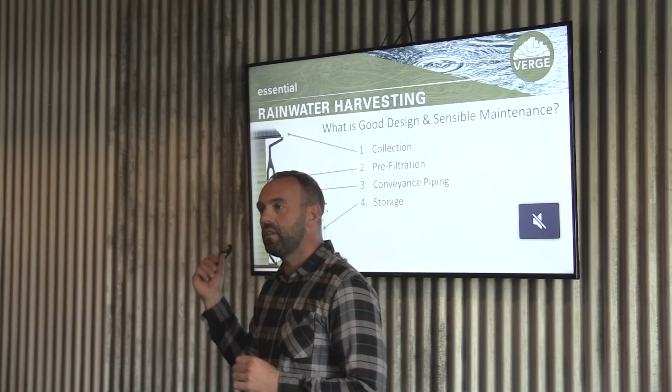Let's say that you do go to the little bit of extra effort to set up a proper system on the front end, and you have another 1 in 100 year flood, which by the way some scientists were saying was a 1 in 50 year flood. Just keep that in mind. And all of a sudden you lose your treatment plant again, but you know that you've done your due diligence and you've built a system that is capable of potable consumption. That's a great situation to be in. That's a nice little insurance policy that doesn't cost very much to have set up on your property.

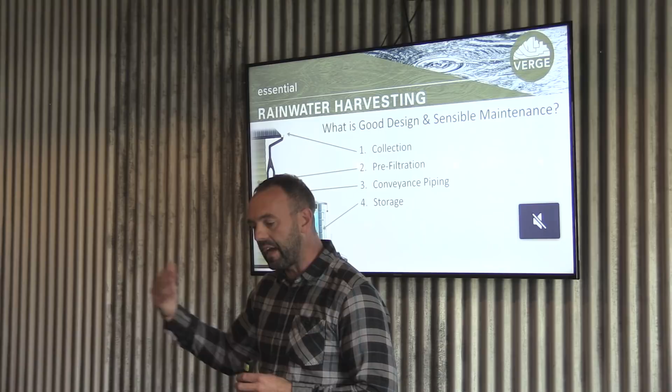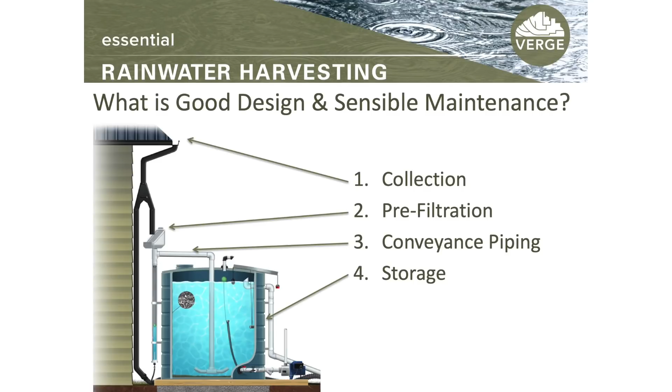As you'll see, it's a lot simpler than you might think. So the next few slides, we're going to talk about collection, pre-filtration, conveyance, and storage, and the best practices associated with that in order to set up a successful rainwater system.

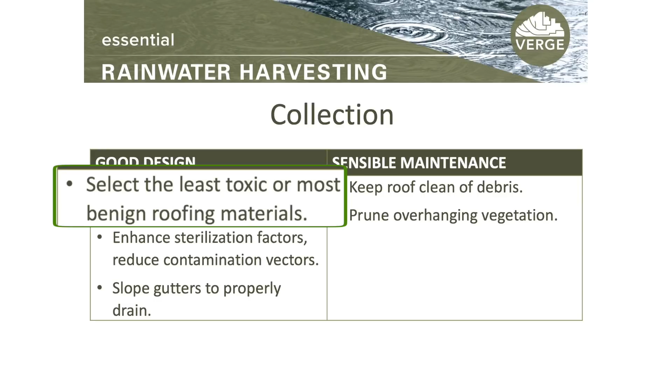So collection is basically your roof, and hopefully it makes sense that you should have a roof that has the least toxic materials involved in it. I always get the question, can I harvest off of a tar shingle roof? The problem is actually not the tar or the bitumen. The problem with a lot of those shingles is that they themselves are embedded with fungicides.

So if you're harvesting water with fungicide in it, and you're using it to irrigate your garden, it's going to end up in your garden, right? I love the ahas that we just had right here. It's the same thing I get when people say, well, why would I harvest the water off of my driveway if there's oil on my driveway? Well, because the minute you start harvesting the water off your driveway, you're going to make sure there's no oil on your driveway.

You're going to fix your car. So it's a feedback mechanism again, right? And if you know you're going to harvest the water off your roof, you might choose a different roofing material. And maybe we could just make that roofing material obsolete, because it doesn't matter if it ends up in your garden or it ends up in the Sheep River. It's ending up somewhere. The difference between the Sheep River and your garden is it's personal. You've got to deal with it yourself.

So we want to choose materials that are the least toxic. As we'll see here shortly, the systems are actually very resilient for reasons that were not apparent 100 years ago that are very apparent right now. So we'll talk about how toxicity is dealt with in the rainwater harvesting ecosystem.

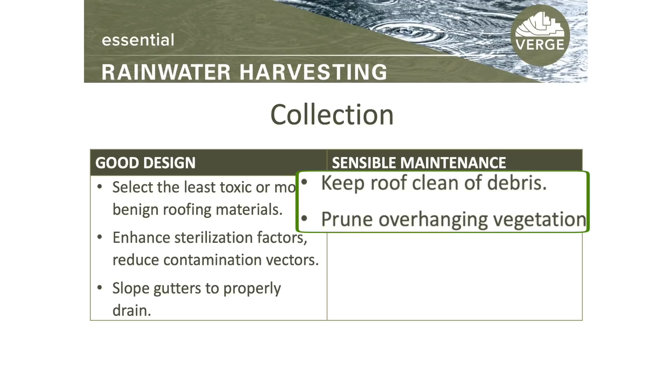We want to enhance sterilization factors, reduce contamination vectors, slope the gutters to properly drain, and then maintenance is basically keeping your roof clean of debris and pruning overhanging vegetation. So let's go into these a little bit more.

It turns out that when we think about a treatment train in a rainwater harvesting system, what we mostly think about is filtration. But it turns out that every stage from where the drop actually hits the roof to when it comes out of the tap represents part of the filtration or treatment train system. And you cannot separate any one component in that system. Every part of that system actually plays a role in cleaning up the rainwater.

So on the roof, removing the trees around your roof and allowing UV to hit it is going to sterilize the roof. UV light is an incredible sterilant. And removing the branches from the roof is going to prevent the organic matter from falling on it, and it's also going to prevent birds from crapping on your roof, which actually turns out is not really even a big deal. But it's still best practices to keep the birds off and keep the trees vegetated.

The tree vegetation, the biggest problem that we have with it is it clogs up the gutters, which prevents it from getting into the rain tank. Turns out, and I'm not going to encourage you to do this, but it turns out that a gutter full of leaves and organic matter acts as a biofilter and will actually produce cleaner rainwater than if you keep your gutters clean. One of the other problems that happens when you have standing debris in your gutters is that it can get wet. It usually does stay wet, and it will actually cause galvanic action and will eat through your gutters. So it's more about keeping your gutters for longer periods of time than it is about worrying too much about the organic matter getting into your rain tank.

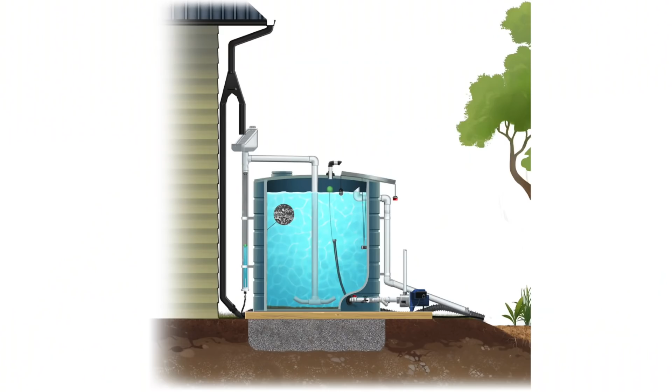And so pre-filtration is the next piece. And actually, in our climate, we actually want to have this diversion valve. So in the wintertime, especially for an above-grade tank, we actually just send the water out to a rain garden or someplace on our landscape. In the summertime, we flip that over and send it into what's called a rain head. So pre-filtration is literally just a screen on a 45-degree angle with a basket underneath it, and it keeps all of the debris out of the tank. They're really tiny little holes, and then underneath it we've got a first flush diverter.

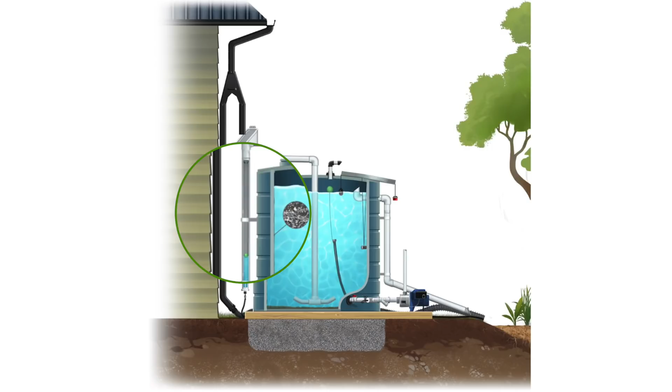Turns out these aren't needed. They're actually a waste of time and money. They do work a little bit, but the problem is that most people don't do the maintenance on them, and so you end up with a pipe full of septic effluent, essentially. So a little ball sits in here. The first flush of water that comes off of the roof ends up in this pipe right here.

As soon as the pipe fills up, all subsequent water flows into the tank. The idea is that the dirtiest water ends up in that pipe, and there's a small hole at the bottom that allows the water to drip out into your rain garden. At the end of the rain event, this ball comes back down to the bottom, resets, and can be used again.

I don't even put these on my systems anymore because the data doesn't support that they actually do anything, so why waste your time and money? If you don't maintain it, it's actually going to make your rainwater worse, so just skip that step. I have it here so we can talk about it, because everybody thinks they need first flush diverters. I've been teaching people to use first flush diverters for 10 years, and as a result of all the research I did, I'm not using them anymore.

The next part is pre-filtration, and we want to include a pre-filtration strategy in your design. This is the most important thing in the entire system - that screen. They're about 50 to 60 bucks, they'll last for the life of your rainwater harvesting system, and they do more than pretty much everything else. The other thing they do is keep mosquitoes out of the system.

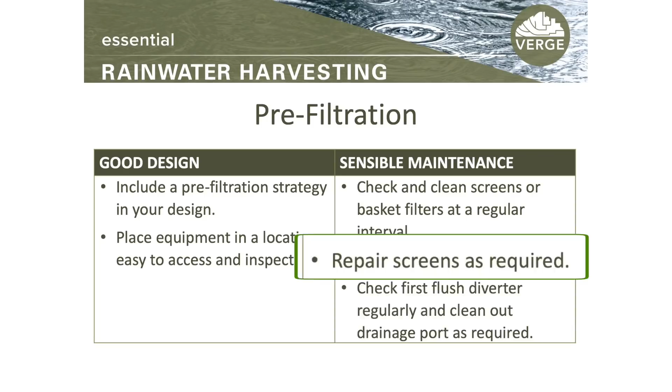You want to place equipment in a location easy to access and inspect, so make sure that when you're walking around the house you can see this screen. They're very easy to clean - mostly self-cleaning, but every once in a while you have to pull the screen off and clean it yourself. Check and clean screens or basket filters regularly, repair the screens as required, and check the first flush diverter regularly and clean out the drainage ports as required, assuming you've got a first flush diverter.

Okay, so the conveyance piping - we want to place PVC piping protected from direct sunlight. If you do have PVC piping in direct sunlight, you want to paint it, because PVC is not UV stable. You actually want to coat the piping or use a different material.

Generally speaking, we want to have dry systems. What that means is all the piping is on a bit of an angle, so at the end of a rain event, the water will leave the pipe and the pipe is dry. There are actually versions of systems called wet systems. We're not going to generally use them too much up here because the pipes will freeze through the wintertime.

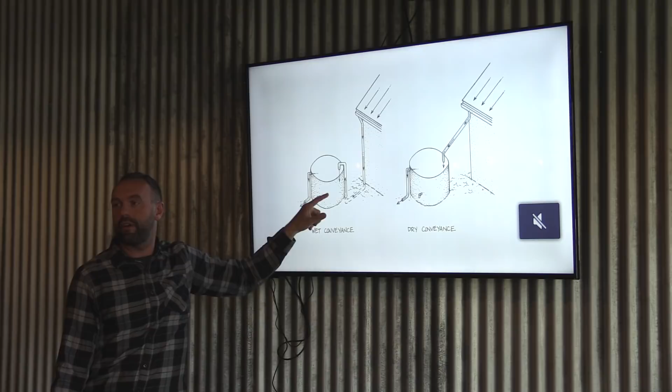You want to check and clean screens and basket filters, repair screens as required, and check the first flush diverter as part of that. Just quickly, that's what a wet system is - essentially the pipe remains full all the time, and in rain events it'll just push the water into the tank. But any kind of material or dirt in there is going to settle out in that pipe, so you've got to clean it regularly and be able to empty it in the wintertime, versus a dry system where we have slope and the water will leave.

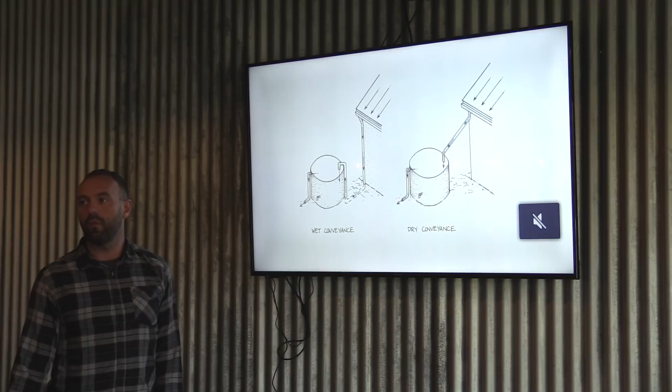This was probably the most interesting part of writing the book, and it just completely blew my mind. Whenever I find stories like this, it gives me incredible hope for the future. There's this thing in the world that microbiologists are very familiar with that most people are not aware of, called microbial infallibility. Has anybody heard of that? Microbial infallibility is this idea that there has never been a place on Earth that they have not found microbes, including nuclear fuel rods. Microbes have the ability to exist in any environment - they're probably in space too. And most of the time when these microbes are hanging out there, they're usually doing something good.

It turns out the Romans actually knew this, but they didn't know what the mechanism was. The Romans knew - if you look at the literature about Roman civilization, because they were big rainwater harvesters - that water stored in tanks would improve over time, that it would purify, but they had no idea what the mechanism was. But now we know. So if you look back at this tank, we have this diversion system down here.

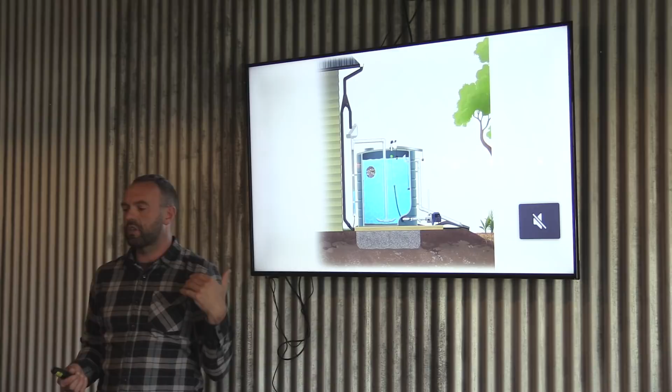You don't have to have two, you can usually get away with one. What we're doing there is creating a quiet inlet, trying to move the water very gently when new rainwater comes in and trying not to disturb the sludge layer. A lot of the old literature talks about getting into these tanks and scrubbing them with chlorine and removing the sludge layer, and now we've found that is absolutely not what we should be doing. We want to not touch the sludge layer, and we do not want to scrub our tanks.

It turns out they did a whole bunch of tests. Dr. Coombes did a whole bunch of tests in Australia where they looked at the center water column, and then they looked at the biofilms, the microbes forming on the outside of the tank, as well as the sludge layer on the bottom of the tank.

This is the part that blew my mind. When they did a screening of heavy metals in the water - arsenic, lead, cadmium, nickel, zinc, aluminum, all the metals you don't necessarily want in any high concentration in your body - the one that comes to mind is lead. They found lead in concentrations 300,000 times higher in the sludge compared to the center water column. That's like, bam, huge, unbelievable.

Basically what's happening is rainwater has very little nutrient in it. It's a liquid that very little can grow in because there's no nitrogen, phosphorus - there's a little bit of nitrogen, but not a lot. So you start putting water into a system where there's all these microbes and they're very hungry because it's a nutrient-less environment, and they will basically consume whatever they can. So the biofilms start to suck out all of the toxins in the water all on their own within like a 2-week period of time, and they will clean the water out.

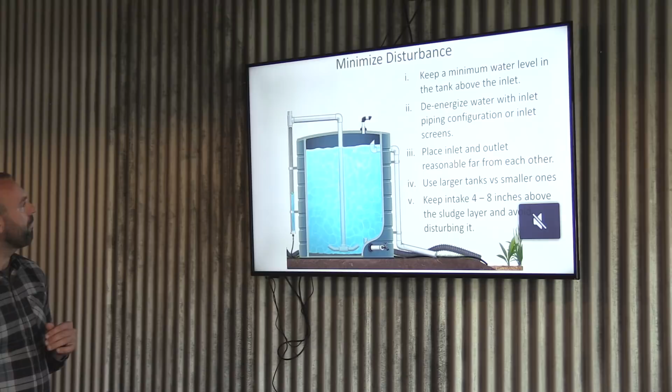So we want to minimize disturbance by keeping minimum water levels in the tank. Our outlet to our hose bib or to our pump is above our inlet - we're always minimizing the turbulence at the bottom of the tank. We want to de-energize water with an inlet piping configuration or inlet screen, either a screen at the top that creates a rain shower or these upturned inlets in the bottom of the tank. We want to place the inlet and outlet reasonably far from each other, as far apart as possible. We want to use larger tanks versus smaller ones.

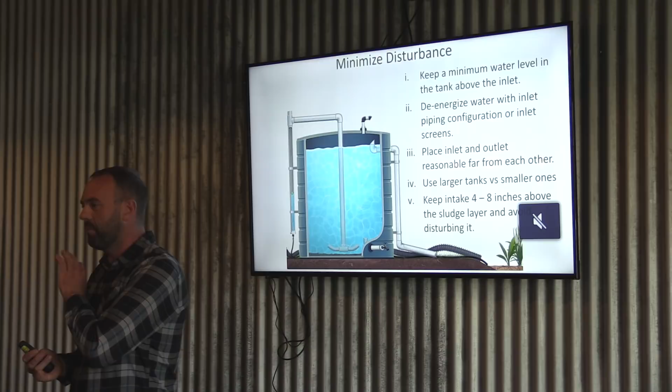The best thing about 50-gallon rain drums is that they're a gateway drug to bigger rain tanks. It's amazing how often people put them in and they're like, it was full in like 3 minutes. And it's like, yes, so you need to get a bigger tank now. Those 50-gallon drums are completely insufficient for any kind of meaningful rainwater harvesting. So use them for something else, like compost tea, not for harvesting rainwater.

We want to use larger tanks and keep the intake 4 to 8 inches above the sludge layer. So again, always keeping the bottom of this system in water and not disturbing the sludge layer on the bottom.

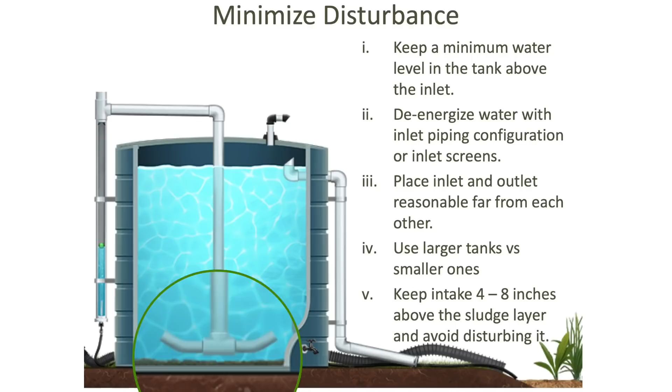Avoid unnecessary sterilization, chlorination, or desludging of your tank. What's crazy is even the biofilms produce polysaccharides, which are sticky sugars, and they've even found bugs and insects stuck to the wall. So they're actually cleaning out particulate as well as water-soluble contaminants.

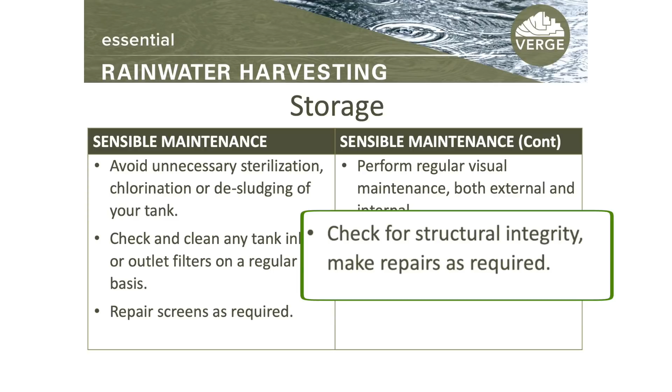Check and clean any tank inlet or outlet filters on a regular basis. Repair screens as required. Perform visual maintenance both externally and internally, and check for structural integrity to make repairs as required. So very simple.

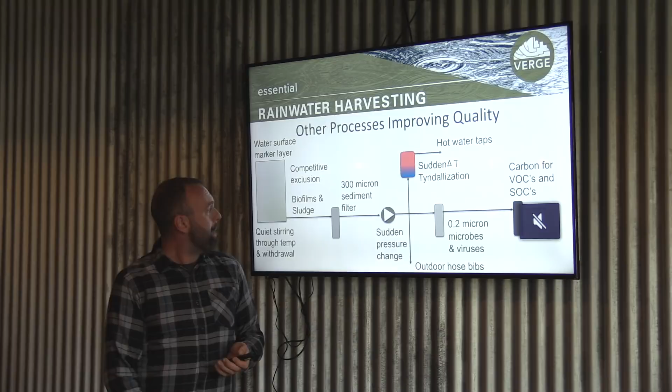The last thing that came out of all the research was that the water mains companies trying to discredit rainwater harvesting were taking rainwater from the tank and testing it, which isn't fair, because when you test mains water, where do you test it from? The tap. It turns out there's a whole bunch of additional treatment that happens from the tank to the tap as well, so it's not a fair comparison. We're not doing science if we're cherry picking data from a tank and not allowing it to go through the plumbing system. Biofilms exist in these lines, and there's a couple other things that happen.

There's absolutely going to be spores in the water, fungal spores. What happens when you've got fungal spores and microbes in an aqueous solution is they stay viable. Spores, when they're dry, are not viable, and they're waiting for the right moisture content to become viable so they can do what they need to do. But when you have spores and microbes in an aqueous solution, they're all viable, they're alive. They're waiting for food, essentially, to do their thing.

So when we run it through, the first thing we do is run it through a very coarse filter. This is mostly to protect the pump, but it also takes some of the larger particles out. This won't necessarily filter out spores - in fact, it definitely won't. One of the first things it comes across in the treatment train is the sudden pressure change. That's going to have an effect - it's going to kill some of the microbes as we instantaneously increase the pressure in the system.

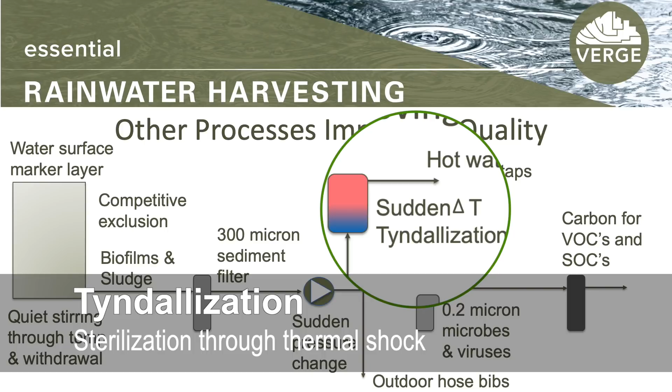The next thing, if it goes into a hot water system, is something called Tyndallization, which is essentially a thermal shock. Because the spores and microbes are viable, putting them into a sudden thermal shock is going to kill them. So anything coming out of your shower, especially if you're keeping your tank hot enough - 60 degrees Celsius - that'll deal with Legionnaires and any of the other potential issues that might be in that water.

All subsequent drinking water goes through a very simple 0.2 micron ceramic filter, which will take care of everything except viruses. And the only viruses we're really susceptible to are viruses from higher order mammals. So as long as you don't have humans or cows shitting on your roof, you're good.

The code is going to require you to put in a UV light, which is what they're calling a second barrier - so it's two barriers, barrier number one, barrier number two. There are ultra filters that will go down to, I think, 0.1 micron, which will actually capture viruses as well. Those are available in Australia, they'll come to Canada eventually. But anyways, put a UV light in here.

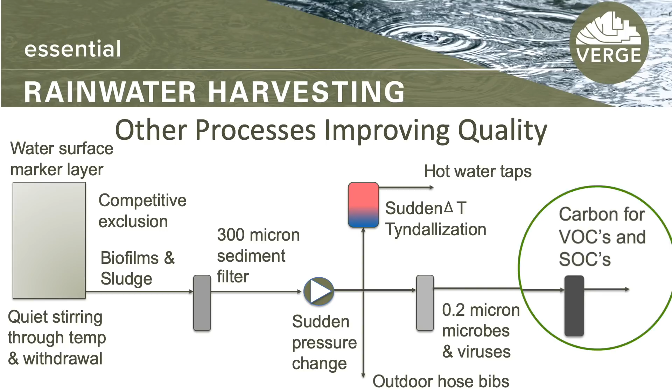And then, because we live in an agricultural province, the one thing I think is really important to do is make sure you have a carbon filter to deal with SOCs and VOCs - Roundup, herbicides, pesticides, and anything else being sprayed out there in aerosol form that ends up on your roof. Those things are still ending up in your municipal water source too, it's not just rainwater. So you should have carbon filters on your water as well if you don't want to be drinking that stuff.

Keep in mind, people don't realize this, Roundup is actually not patented as a herbicide, it's patented as an antibiotic. It just happened to kill plants, which is why it's being used the way it is now. If you want to look into Roundup, check out Dr. Zach Bush on YouTube.

It will scare the crap out of you, but it will also inform you on how to manage the toxicity. Roundup is going to make DDT look like child's play. It's just coming out in the wash now. All of our pesticides are hormone disruptors. Think about that, hormones operate at parts per billion in our bodies. We're eating plants that have been sprayed with hormone disruptors, and that's in our water.

They found Roundup in every test. They did a test on pregnant women, one group ate all organic food, one group ate non-organic food. Both sets had Roundup in their breast milk. It's everywhere, so do your research. It doesn't matter whether it's rainwater or it's even ending up in the groundwater. Denmark banned Roundup because they found it in groundwater. The stuff doesn't decompose in 3 years.

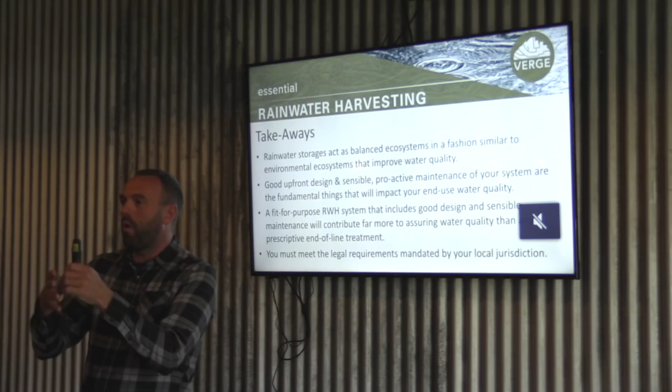Rainwater storages are balanced ecosystems in the same way that environmental ecosystems improve rainwater and regular water. So in some ways, allowing our water to sit in this treatment train is actually making better water for us, if you do it properly, than what you're getting out of the mains water. If you talk to people that manage city water systems, they're constantly fighting biofilms. It's their nemesis, because biofilms reduce the efficacy of chlorine.

A properly designed rainwater system should theoretically produce better quality water than mains water, if it's done properly. Good upfront design and sensible proactive maintenance of your systems are the fundamental things that will impact the end-use water quality. So you cannot make up for bad design with filters. You've got to get the design piece right, and as you can see, it's not that hard. It's pretty simple.

A fit-for-purpose rainwater harvesting system that includes good design and sensible maintenance will contribute far more to assuring water quality than prescriptive end-of-line treatment, and you must meet the legal requirements mandated by your local jurisdiction.